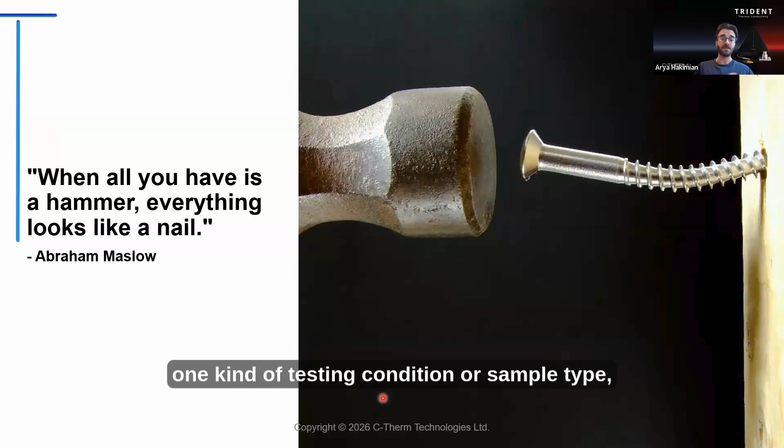This quote here is one we like to reference from Abraham Maslow: when all you have is a hammer, everything looks like a nail. This really embodies the idea behind Trident. One of the biggest sources of poor measurement data or issues with results is when you're trying to take a method that may be really good in one area, one kind of testing condition or sample type, and then apply it to a broad range of materials it may not be designed for. So with Trident, you have more of a toolbox approach to pivot into the option that's most appropriate for what you are looking to do.

For those that may be new to thermal conductivity, or just looking for a general refresher, towards the end of last year we updated our method selection guide. This is a fairly recent update that covers all of the transient methods available on Trident, as well as other methods available in the industry. If you're looking to dive into a bit more detail on some of those different options, this is a nice free resource available that I'd recommend taking a look at.

But all that being said, done with the little intro. Now we're going to jump into our topic here today, which is thin films. When I was looking through recent work we've done in the past year, but also what's been published out there and some things popping up in the news, thin films are certainly a hot area for a variety of different reasons.

The whole miniaturization, or trying to decrease the weight of different systems, thin films can really be an enabler for many of these different technologies, ranging from standard electronics to maybe some things going into aerospace or defense industries. Another interesting point I've seen is a lot of work on optical-based technologies.

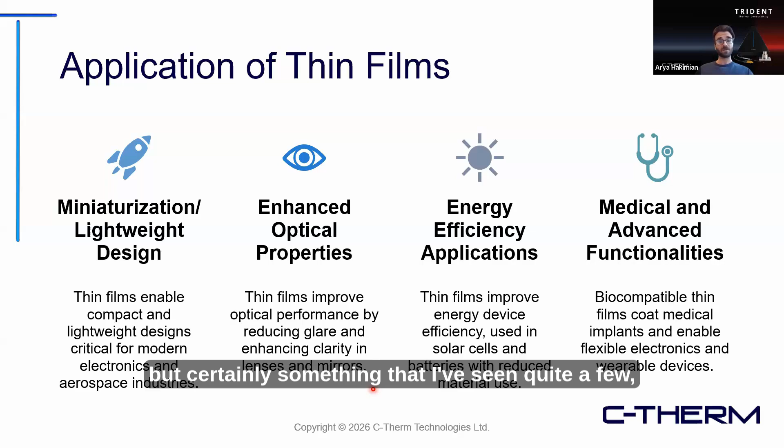Energy efficiency applications—whether this is energy harvesting, energy storage, batteries, solar cells—certainly have a play with thin films. And then another one, maybe a bit more niche, but something I've seen quite a few areas of research being done in is biomedical or medical-based devices, different types of protective coatings for implants or more flexible electronics.

These are all different areas where thin films are certainly at play. It's by no means all-encompassing, but some of the more common themes we've seen over the last year or so.

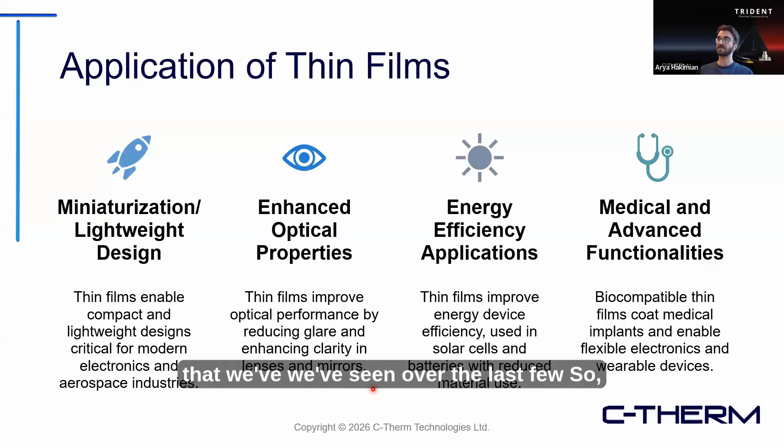I picked this one also. I was just kind of looking. This was from a post from MIT News, something that's quite popular for thin films. This was towards the end of last year, looking at utilizing thin films as an enabler for lightweight, but specifically on night vision technologies. Combining that lightweight miniaturization with some of those optical applications. I believe this has a variety of applications, but certainly in defense, and some of the augmented reality tools that exist there.

But they're also commenting that with more of these advancements, this specific method they're looking at could be applied to wearables, computing elements in a variety of different ways. A quote from one of the students working here is, this thin film considerably reduced not only the weight, but also the cost, making it overall a better, more easily integratable technology. So, certainly a lot of new and interesting developments going on in this space.

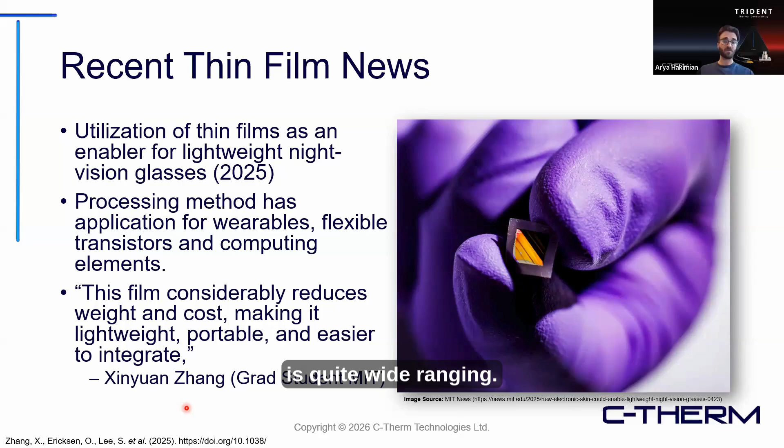So thin films, in terms of where they're being used, is quite wide ranging. Now, coming to the actual testing of films, I'm going to focus primarily on the thermal conductivity side of things, but there are certain challenges that exist. Being a thin film, small format, very miniaturized sample, your traditional steady state methods and many of the more basic, even transient approaches, your thickness requirements aren't really going to be met. So there are some fundamental challenges here just based on what many methods will require as a minimum to be able to take a valid measurement. These are just some of the points we'll talk about going through in today's content.

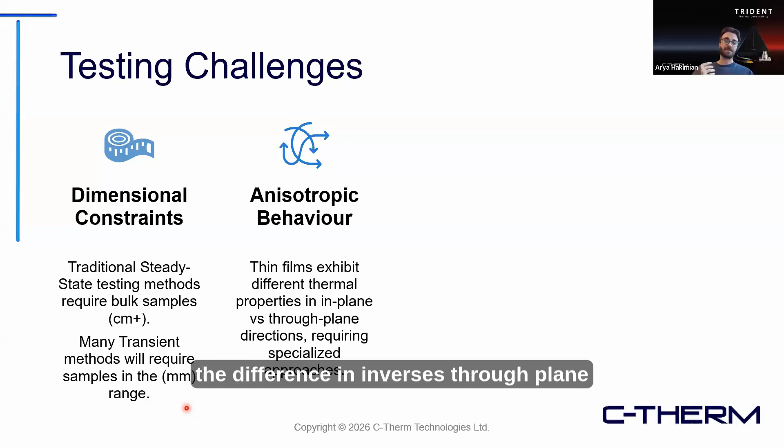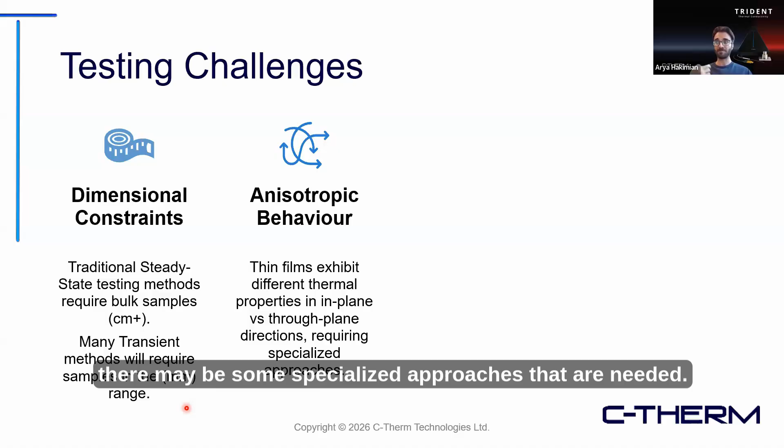Another big one is anisotropic behavior, the difference in in-plane versus through-plane thermal conductivity. Sometimes this anisotropy is present, maybe it's not desirable. Other times groups are really pushing to introduce high levels of anisotropy. But in either case, if it is present, certain techniques may be directionally dependent, others may average out over a larger area. So if you are looking to separate out and quantify those, there may be some specialized approaches that are needed.

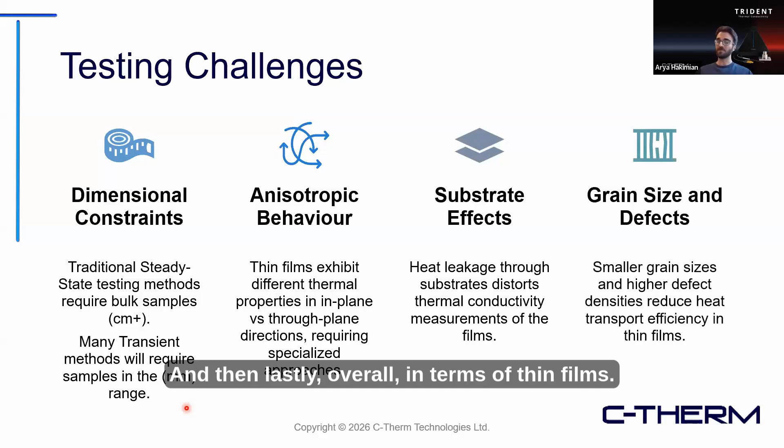Substrate effects. So talking about thin films in terms of coatings, or when your film isn't freestanding, it has to be on a backing material. That substrate impact can potentially introduce errors in the measurement, depending on what type of approach is taken. And then lastly, overall, one of the big things is the grain size and potential defects that can be introduced, whether that's in the formation of the film or how it's being used in application or long-term wear. These are all little things that can come in and impact the overall transport efficiency of that heat within the system. So it's something that should be well understood.

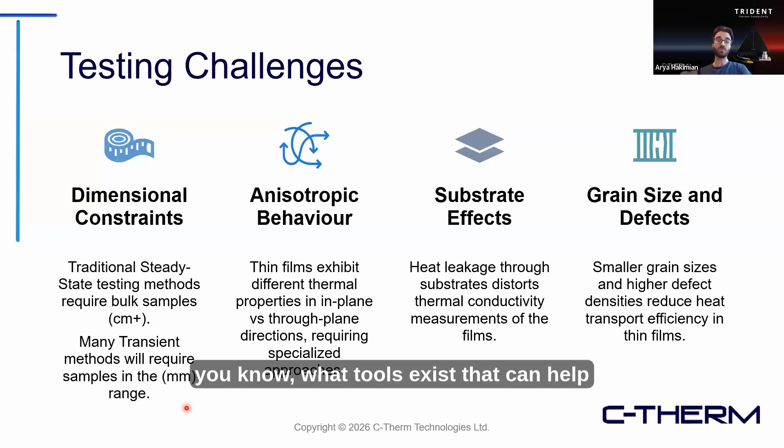So all of these together present certain, let's say, roadblocks in terms of how you would go about testing. So we need to look at what tools exist that can help overcome some of these potential challenges.

But overall, before we go into some of the different methods, we're talking about thermal conductivity, but why does it matter? Across a broad range of material types, thermal conductivity, you'll see some similarities in that, and true for thin films as well, but very much ultimately used as a benchmarking metric for the overall performance and the reliability. And really depending on the application space, can have quite a big influence on that overall system. So whether you're looking at electronics, more insulative coatings, or thin films, or otherwise.

Now I'll break it down into two. So you have your high thermal conductivity applications for more of these thin films. And I'd say by and large the big one is going to be TIMs, or thermal interface materials. So of course, any type of electronic generating heat, we have to have a way of dissipating that, or efficiently removing that from those potentially sensitive components. And TIMs being in quite a variety of different forms, shapes and sizes. Thin format TIMs are certainly something that is being heavily investigated in many of these new technologies that are coming out.

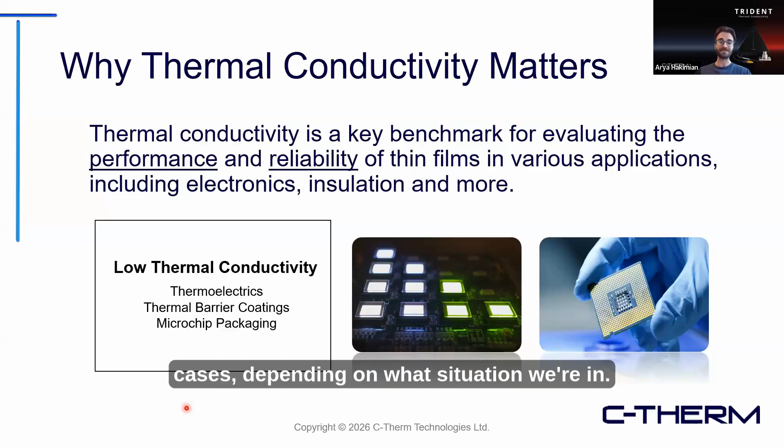But there's also the low thermal conductivity side. For thermo-electrics or thermal barrier coatings, different packaging applications, there are certain scenarios where you're actually looking to more insulate certain systems. Maybe it's for protection, or maybe that's your performance metric, you're targeting lower conductivity as your ideal situation. So you can see both, the high and the low K materials in thin film formats have different use cases depending on which situation we're in. This was a publication by Yang et al. in 2025.

I pulled this just interestingly because one of the highlights, this was on the main summary page, noting here the thermal conductivity was decreased from about 0.6 to 0.22. And that was their desirable outcome.

In many cases, a lot of what I more regularly see is groups trying to bump up that thermal conductivity, again a lot of those thermal interface material situations, but certainly some scenarios where going the other way is more important.

Specifically for this application, for those in the thermoelectrics space, you'd be familiar with the thermoelectric figure of merit. So the equation here, you can see the different terms, but where thermal conductivity comes into play, being in the denominator, we're trying to have a high ZT value, but to get that, we're looking for low K systems.

So in the context of these thermoelectric applications, again that lower K material property is more desirable. Just a little bit of a tidbit of information there for those that may be entering into or working in this space.

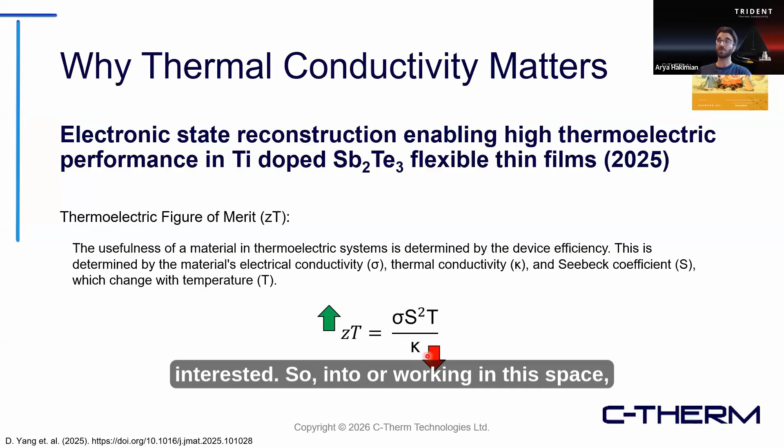But this brings us to, okay, we know what we're looking for, we know the sample type, but how do we go about testing it? So on the Trident system, there are a few different approaches we'll look at today. First one being with the Flex Transient Plane Source, or TPS.

So the TPS, you can see a picture of it here. This is a very thin, flexible, double-sided sensor design. But specifically, we're going to be looking at the thin films utility, as described in the ISO standard, ISO 22007-2. For folks interested in TPS testing, this is a really great resource if you don't already have it. It really outlines what this can do for you.

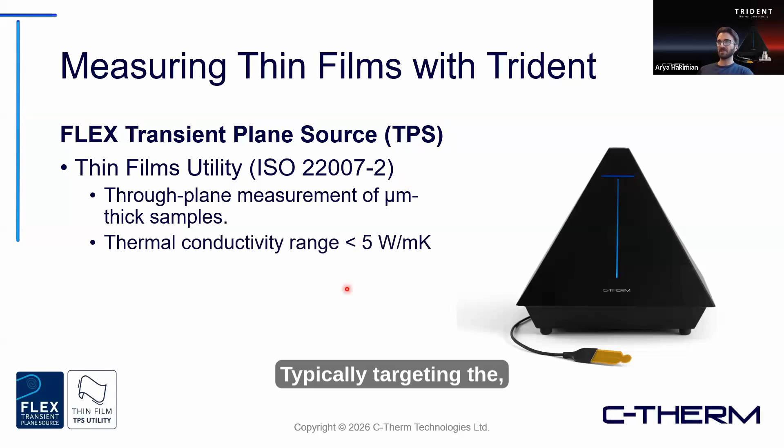So the thin films utility, this allows us to do a through-plane measurement of micron range thick samples, typically targeting more on the lower conductivity side of things, like sub 5 watts per meter Kelvin as a general rule.

Really important when doing testing with the thin films utility is that your materials have a well-defined and uniform thickness. Part of the actual measurement procedure is to use the measured material thickness as an input. So of course, the more control and consistency you have over that, the better your outputted results will be.

I wanted to highlight that the TPS thin films utility, of all the options of TPS testing, is one of the more different approaches, in that it involves a sequential layering procedure and subsequent measurements that are tested. It's not just one singular measurement. And it kind of looks something like this.

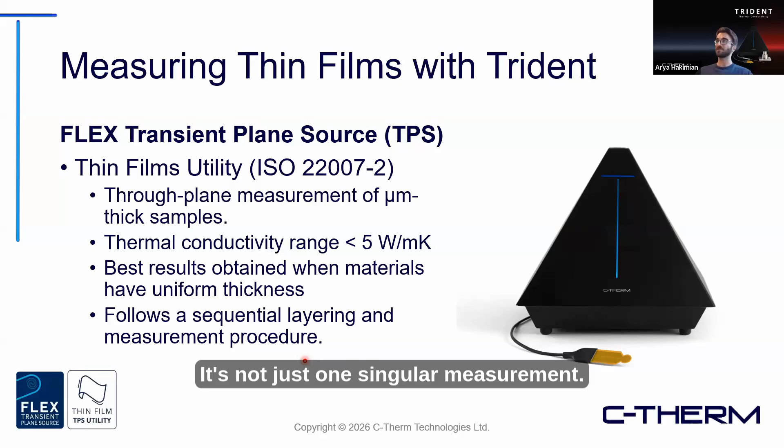Your overall setup, you actually have your sensor in conjunction with a conductive backing material. So this is like your blank or your base measurement. The first test you run with TPS thin films doesn't have any material or thin film at all - you're just taking your blank. You would then take your setup, mimicking what we had in our blank, but now adding in a layer of that film. You would then repeat this a second time with a second layer.

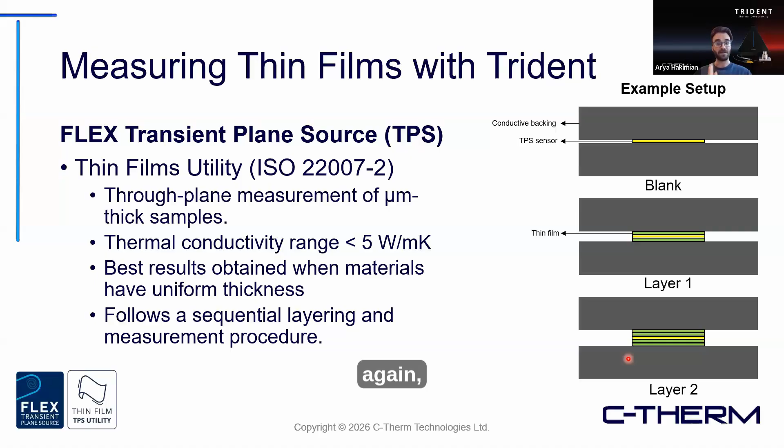Overall, what the testing procedure looks like is you have your sensor with different amounts, starting from 0 to 1, 2 layers of your film. And it allows us to build out a temperature versus film thickness linear regression. Based on that data, we're able to extrapolate out that thermal conductivity, in that Z direction, or that through-thickness of the material.

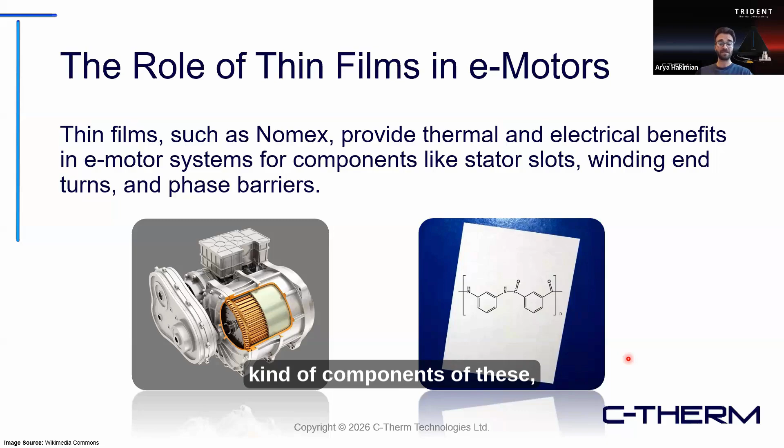So an application that we saw, I believe this popped up at a conference one of our colleagues attended last year, but they were talking about the use of thin films in e-motors. Really highlighting the use of a specific one, actually Nomex. Nomex, if you're familiar, is very commonly referenced for its thermal and electrical benefits in different components of these e-motor systems.

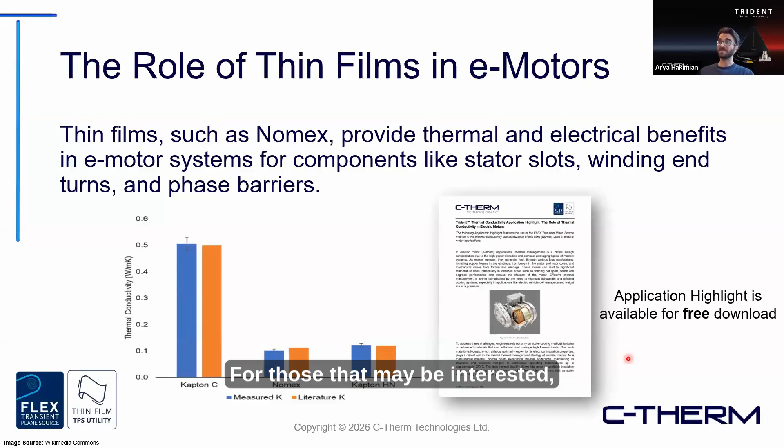So these types of materials like Nomex or related materials like Kapton, for example, these are all things that have been very well tested in the past using the TPS utilities, specifically the thin films utility here. For those interested in looking at more than a few data points, we actually have a full write-up on this application note, available as a free resource download on our website.

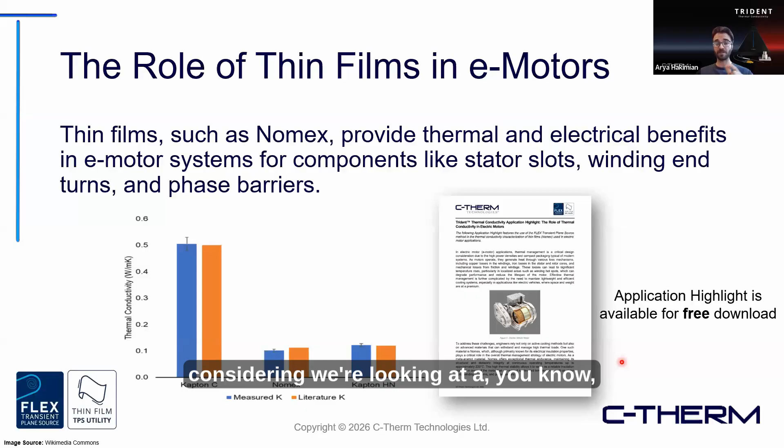Another use case for the TPS thin films is looking at thin films used in fuel cells. My colleague Genesis, who's a lab manager at our thermal analysis group, was doing some work with this last year, looking at different layers of the systems involved here. So whether you're looking at membranes, catalyst layers, or the GDLs, these different materials, thin in nature, can be potentially very relevant in terms of their heat transfer performance.

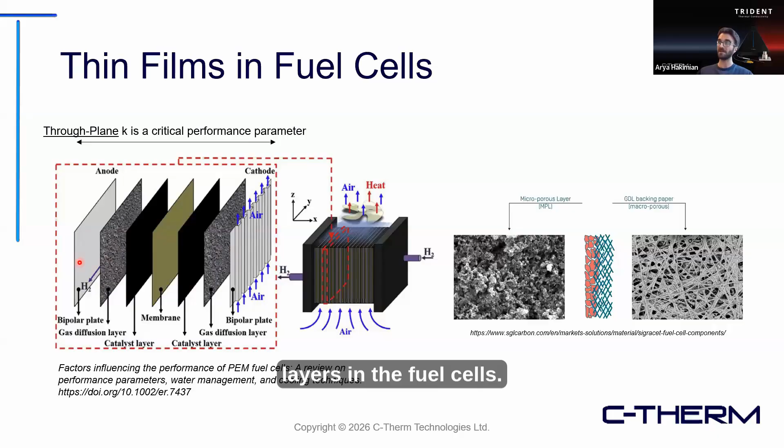Really, the through-plane performance is what was targeted here as the primary driver of interest as it relates to the reaction system as it would go through these different layers in the fuel cells. So some of the testing that was done, again, used the TPS thin film setup.

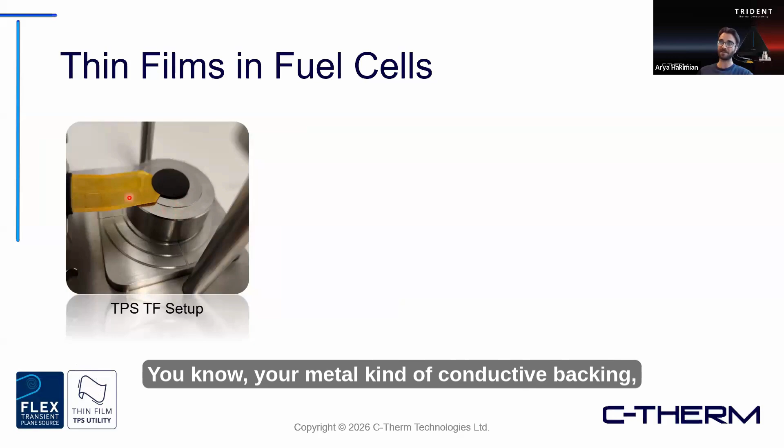Here you can kind of see what half of that setup looks like - your metal conductive backing, the sensor, and the top sample placed over top. Here's another example data set that was looked at.

Comparing two different materials, a neat GDL versus an MPL plus PTFE sample, you can see how they compared in terms of material selection for the system use case. But then there was actually a second set of these materials where it was densified, to see if that significantly impacts the performance of the material.

And as we can see, and as you may expect, the more densified the material is, the better the overall transfer networks will be available, resulting in an increase in thermal conductivity. That being said, these different sample types, being thin films but in different application spaces, show some different capabilities with our thin films on TPS.

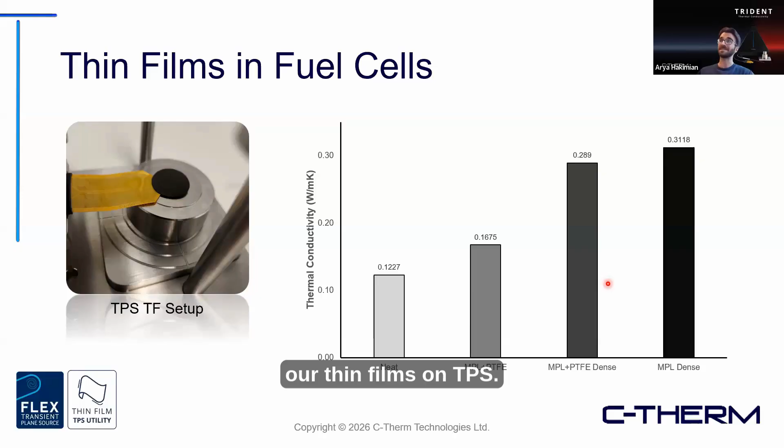But when I was talking about the thin films system, that was, of course, a Z direction or through-plane measurement. There is certainly some interest in the in-plane direction. So how would we go about assessing in-plane thermal conductivity of some of these films? How would we do this on Trident?

Again, I'm going to look at the TPS here, but this time, instead of looking at the thin films utility, I'm pivoting into the slab option. Slab is again a different functionality of TPS - it's an in-plane measurement of the material as it relates to heat spread, rather than heat transfer through.

With the slab utility, it's generally recommended for higher K sample types. The ISO standard stipulates 10 watts per meter Kelvin or higher is ideal, usable down to materials that are above 1 watt per meter Kelvin. But again, generally in the higher K range.

There is some similarity between the thin films option and the slab, in that they both need the input of thickness - how thick the sample is - as part of the testing procedure. So having a well-defined thickness is going to be ideal and important for best results. And similar to the TPS thin film setup, there is a specialized slab setup that is done, and this is what's really allowing us to get at that in-plane measurement.

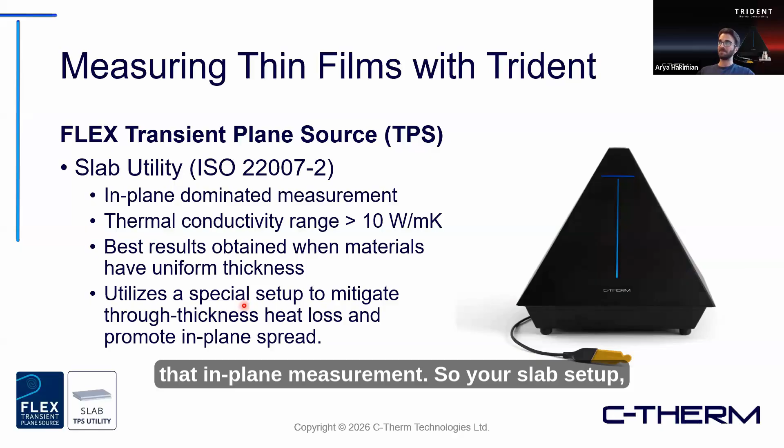So your slab setup: you have your sensor with your two test pieces, but now your backing material is not a conductive sample like we saw with the thin films - it's actually an insulative backing material. Because the idea here is that the sensor is where the heat's being generated, and we're assuming this heat is traveling through the thickness of these very thin samples very quickly, so of course it's going to hit this boundary condition.

If you're familiar with transient approaches, in the more basic or bulk style measurements, the assumption is that no boundary point is reached - it's viewed as a semi-infinite medium. But there's a bit of a difference in how the data is interpreted here, where this insulative backing is here to essentially halt that heat transfer in the through-thickness direction and promote the spread in-plane.

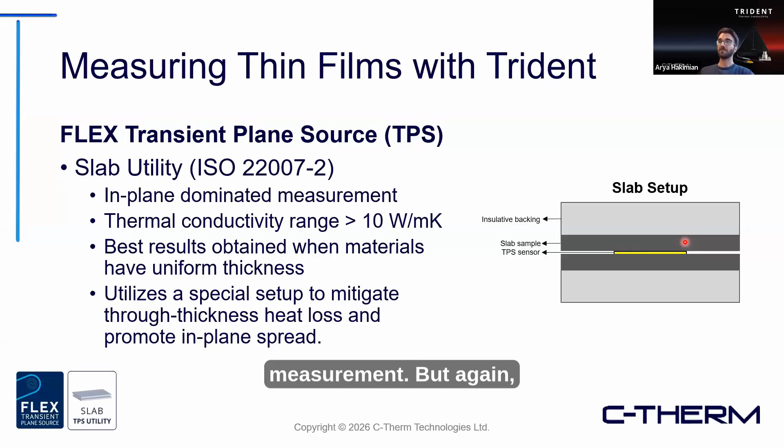Slab and thin films are somewhat opposites of each other in terms of their setups and the directionality based on the measurement. We're utilizing slab here for some in-plane high K measurements of heat spreader applications.

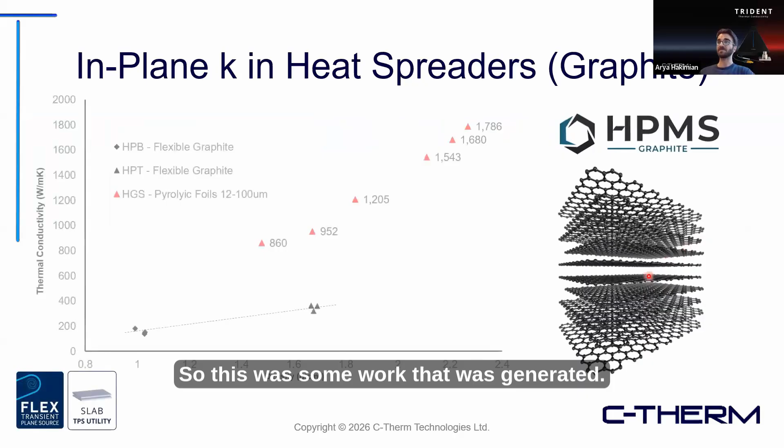This was some work developed in the past year or so, looking at measurements of very conductive, very thin graphitic materials. You can see a few different groups of materials here, including some flexible graphites, flake style, versus some pyrolytic foils.

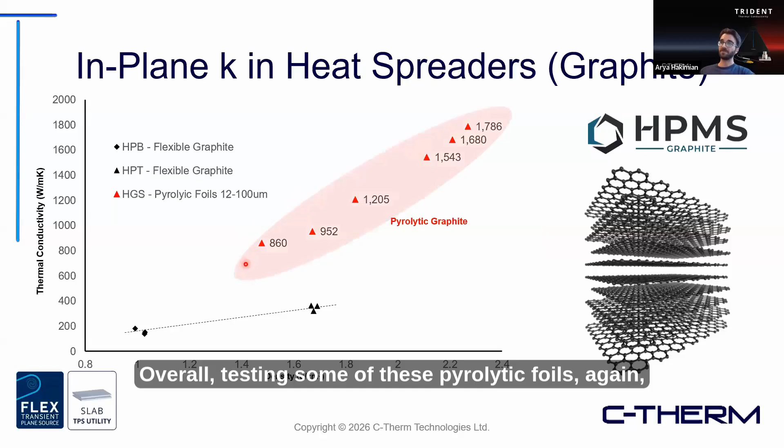Testing some of these pyrolytic foils, very thin, micron range, we were able to get some exceptionally high K results. This is a trend we've seen more and more—very highly anisotropic with very high in-plane conductivities. Over the past six months, there have been multiple opportunities where this was a key focus for groups we've worked with.

Now these samples here, while they weren't into that 1,000+ watt per meter Kelvin range, still a few hundred watt per meter Kelvin—quite high in the grand scheme of things compared to many other materials in this space. To assess these materials specifically, this is where we needed the slab utility, because we're looking more at that in-plane heat spread as the dominating property of interest for these groups.

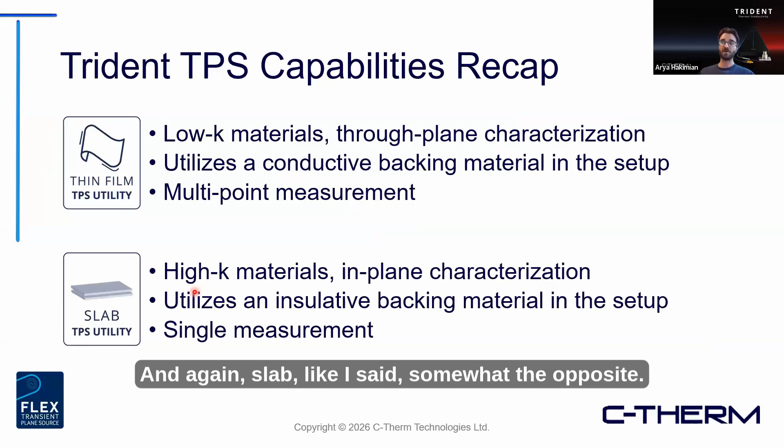As a quick recap on the TPS: the thin films utility is great for lower K materials where through-plane is of interest. It utilizes a conductive backing material, and the measurement flow involves a multi-point measurement approach. Slab, as I said, is somewhat the opposite—you're dealing with higher conductivity materials in-plane, using an insulative backing material, and instead it's done with just one singular measurement.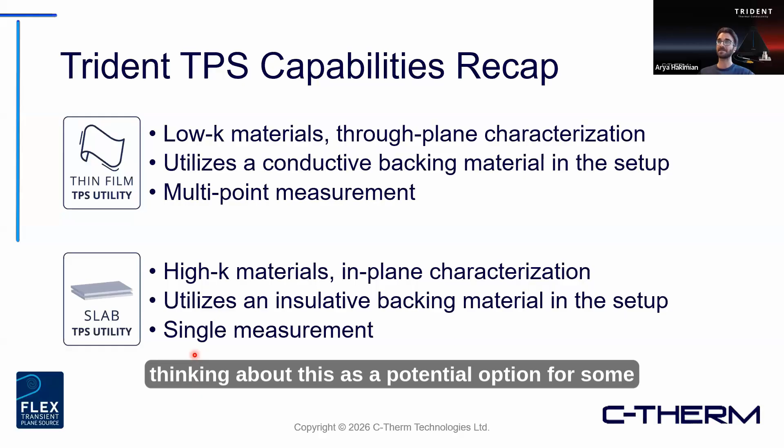I'll highlight this for folks interested in this space, or if you want to deep dive a little more on TPS. There's certainly a lot more information we could go into on this, but just wanted to give you that, to get you thinking about this as a potential option for some of your work.

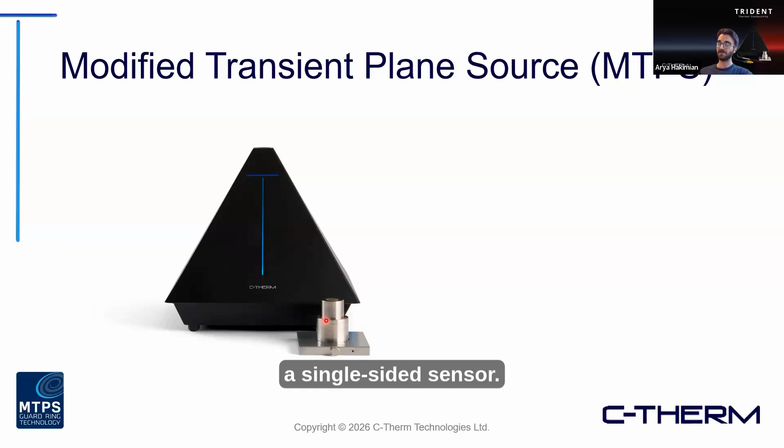Now, we talked about TPS, and one of the other methods available on Trident is the modified transient plane source. This is C-Therm's proprietary sensor design, a single-sided sensor. For those familiar with MTPS, you may wonder why I'm bringing this up for thin films, because your minimum thickness requirements vary depending on material type, but typically we're in that millimeter range. So fundamentally, there's a gap if you're looking at some of those micron range thicknesses.

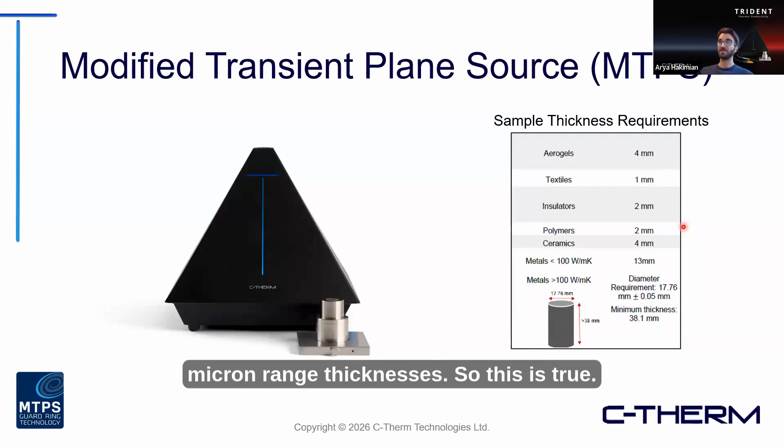This is true—your sample thickness in the standard setup has to cover the length and width of the sensor face, which is about 18 millimeters in diameter, with a thickness in that millimeter range. However, there are some options here.

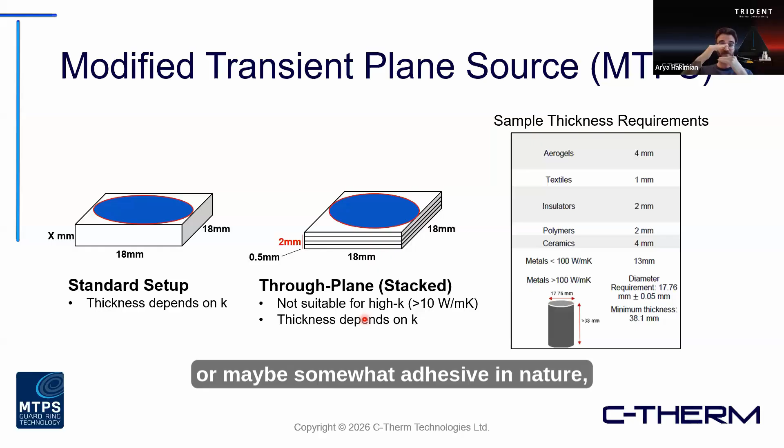One of the main ones is a stacked approach with some of those thinner samples, layering them up to achieve your desired or minimum thickness requirements. I will highlight this is not suitable for all materials, especially once you get into higher K samples—the contact resistance between those layers starts to result in quite a bit of error. The quality of those layers, if they're very flat and planar, or maybe somewhat adhesive in nature, you can get really good stacking. But when you have more uneven, non-uniform surfaces, that's where it becomes a little more problematic.

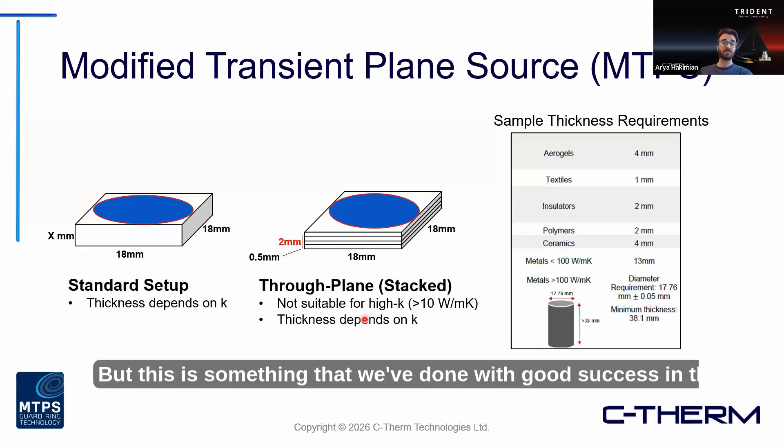But this is something we've done with good success in the past, and I wanted to highlight this application we did in conjunction with Tesa Tapes a few years ago, where we were testing thermally conductive self-adhesive tapes using the MTPS.

In this study, these samples were designed for e-mobility applications. They had thermal conductivities in the range of about 0.7 to 2 watts per meter Kelvin, which was their product of interest at the time. But their thicknesses—some samples were in the millimeter range, but they did have quite a few that were micron thickness, so below what we technically needed. So again, this is where that stacking came into play.

The whole challenge and reason we did this project together was they were running into issues checking their materials in situ. So taking the samples, putting them in a system, turning it on and measuring how much heat was actually being generated and how efficient those tapes were at transferring heat. And when they were comparing their materials to competitor products that had a spec technical datasheet value, something wasn't lining up for them. So we came in as a third party to assist with this investigation.

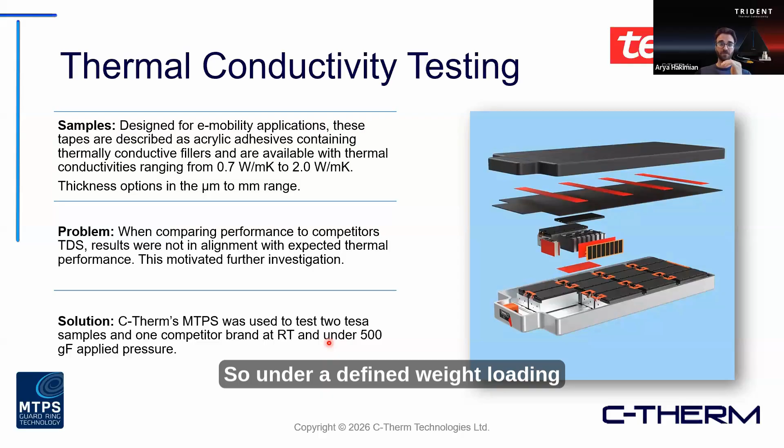What we ended up using was our MTPS to test a couple of their samples, one of the competitor samples, at room temperature, keeping as many things controlled and fixed as we can. So under a defined weight loading of about 500 gram force.

Essentially what the data looks like, you can see it here. The two TESA samples that we ended up testing, our results lined up quite well with the technical data sheet. One of them came actually a little bit higher than what they had previously expected. So this wasn't shocking to them, this was in line with what they were expecting.

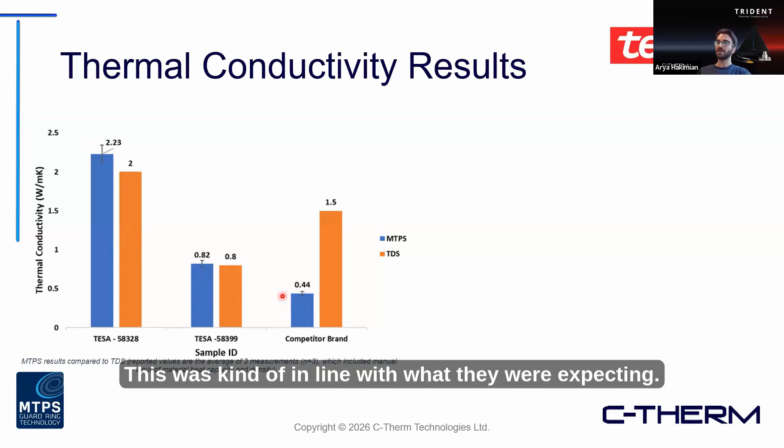But this over here was really what helped answer some questions for them, because in situ they were seeing some ambiguity between what the technical data sheet was saying and what that product was actually providing as an output. And when we did the test, we were showing that the actual thermal conductivity was significantly lower than what was on that spec sheet. This really validated what they were seeing with some of the issues there.

The benefit behind MTPS in this context is that it's a very quick and easy way to compare, if you've got multiple different kind of similar materials and you're wanting to understand where those highest performers are, where those lower performers are coming at. It's a very simple approach to understanding this. For them in their application, this type of discrepancy can have significant impacts on the overall temperature of some of these EV-based systems. So it's really important for them to be aware of where they are falling in terms of general ranking with some of the other competitor products.

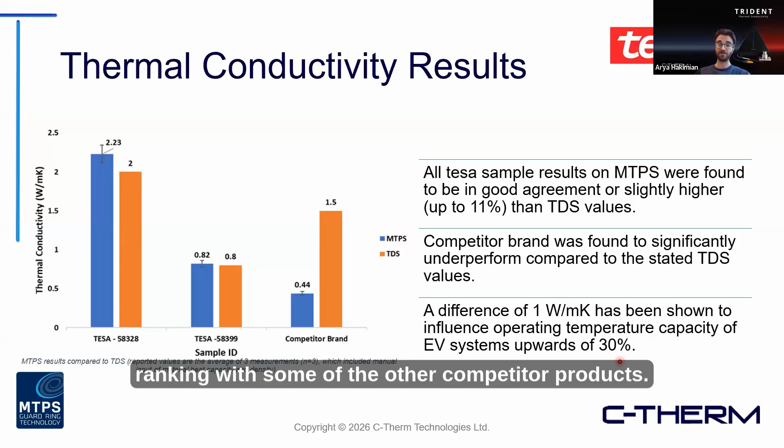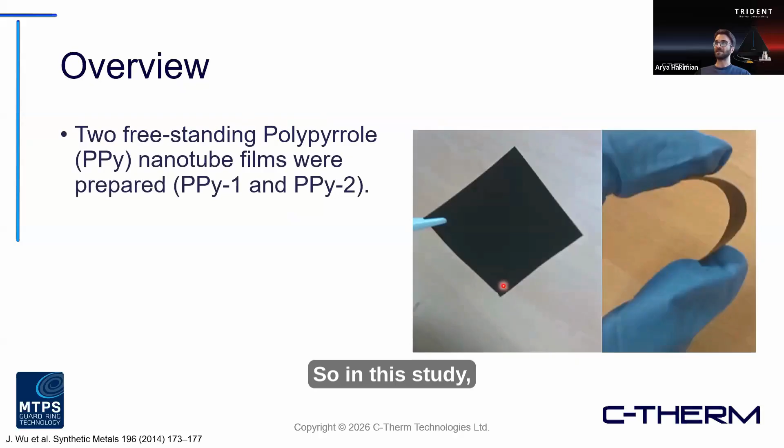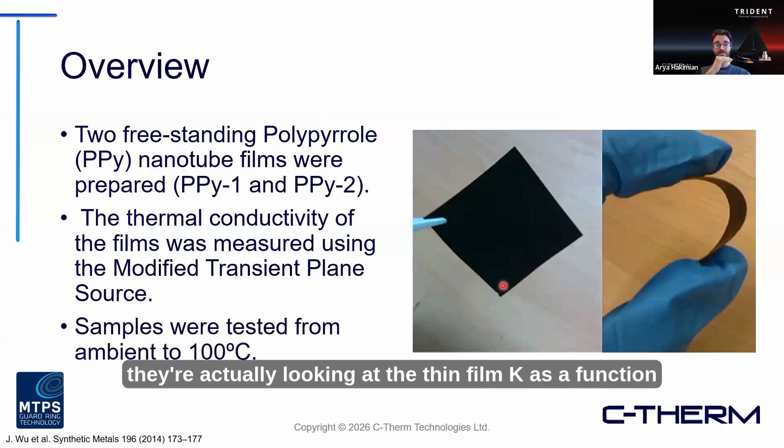This here too, I wanted to share a quick example. Another group working in flexible thermoelectrics, again referencing the use of the MTPS. This is some work coming out of Singapore and China. In this study, they were looking at these polypyrrole nanotube films, two different variants here. The thermal conductivity was tested using the MTPS. And interesting in this one, they're actually looking at the thin film K as a function of temperature.

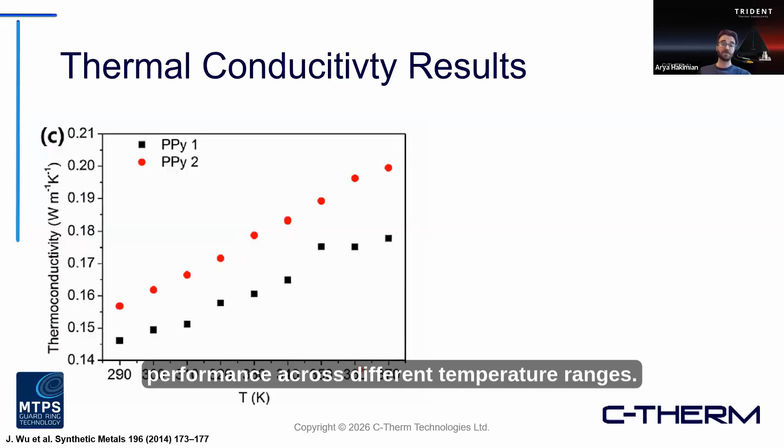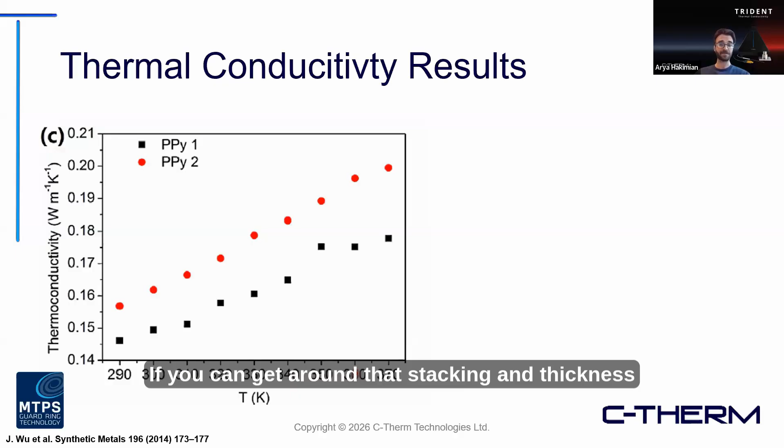So we kind of skip to the results here. You can see again a very nice way of comparing a sample to another material, checking its performance across different temperature ranges. Other variables that can be looked at are different applied force loads. Humidity conditions is something we've seen pop up as well. So these different kinds of investigations - the MTPS certainly does have some play there if you can get around that stacking and thickness requirement.

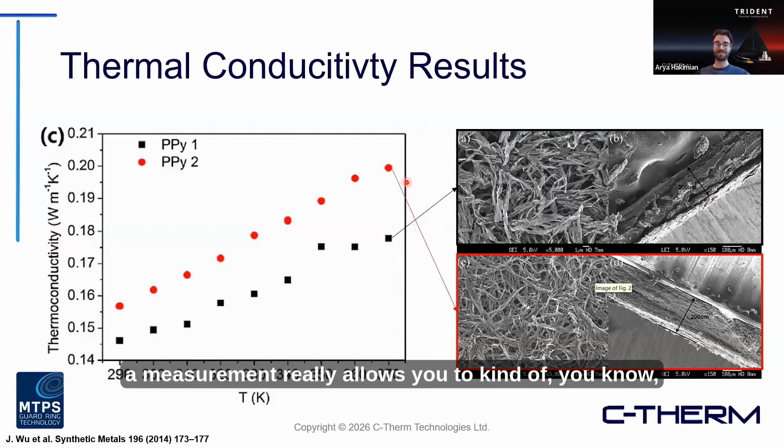I always like showing an SEM image of the samples if we got them available, but you can see the general gap between the two different samples here was ultimately related to that quality of the film. Mentioning earlier some of those challenges with defects in the structure, these are things that you can visually inspect, but really being able to quantify that through a measurement really allows you to have a strong basis in where that performance is going to be.

So as a quick recap here, MTPS again is a really quick, easy way, really great for high throughput environments where you're comparing a multitude of sample types. The benefit here is that there's no settings that the user is adjusting. It is very much a plug and play option, so it really negates any introduction of user bias compared to some of the other methods that are available.

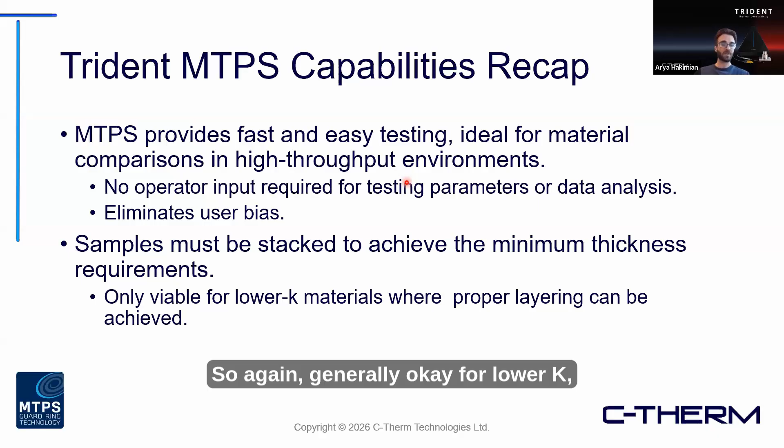Now again, like I've said a few times, just to make sure it sticks, you do need to achieve that minimum thickness. So if you can stack, there is a viable path forward. Of course, if not, that's where you may want to look at some of the other tools. Generally it's okay for lower K, like a lot of polymer-based films, adhesives, things like this - we've had really good success in the past with that.

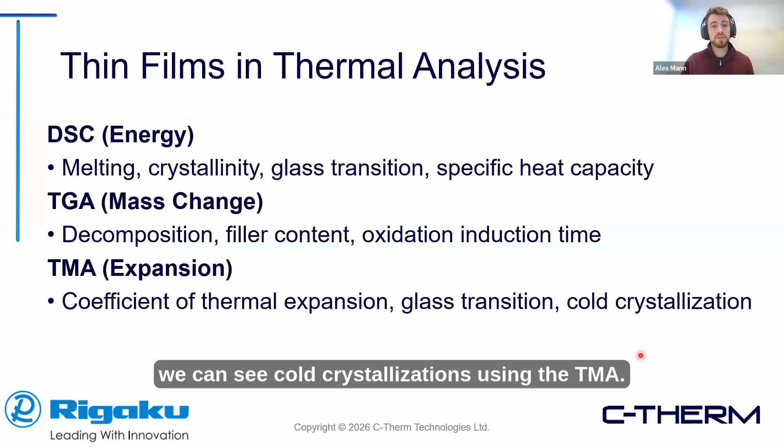The reason we're focusing a bit on TMA is that it requires a special attachment or holder to do this. For the DSC and the STA, the instruments don't require anything special — they can just be run as usual. It's more about the sample preparation.

Rigaku's thin film TMA, is specifically for thin film. Not only can it be used for thin films, but also foils, wires, fabrics — anything within the 10 to 200 micron range. Specifically for thin films, we can go all the way down to negative 150 degrees, which is good for Tg of fluorinated polymers, all the way up to 600 degrees Celsius. Its primary use is for polymeric thin films, so a high temp of 600 is more than plenty.

Because it's a thin film, we need to apply a bit of load to keep it from sagging or buckling during the measurement. We can apply a tensile load as low as 1 millinewton, or as high as 1,000 millinewton. For film dimension, anywhere between 10 to 200 micron is good; after that we'll have to switch to regular TMA. Film length has three options: 10, 15, or 20 millimeters, and the width is fixed at 5 millimeters.

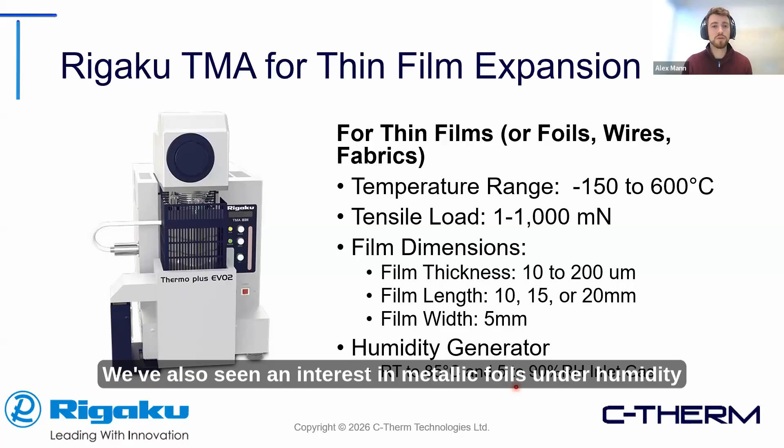One really interesting thing about the Rigaku TMA is the option for a humidity generator. This goes beyond the standard ideal condition, bringing it into real-world application. We can add humidity — our inlet stream to the instrument can range from room temperature to 85 degrees Celsius, and our relative humidity can span from 5 to 90%. This lets us determine how much the sample will shrink or grow when we add or remove water — the coefficient of hygroscopic expansion. This is useful for things like fabrics and hygroscopic thin films, but we've also seen interest in metallic foils under humidity as well.

So real quick, TMA methodology and why the thin film needs something different.

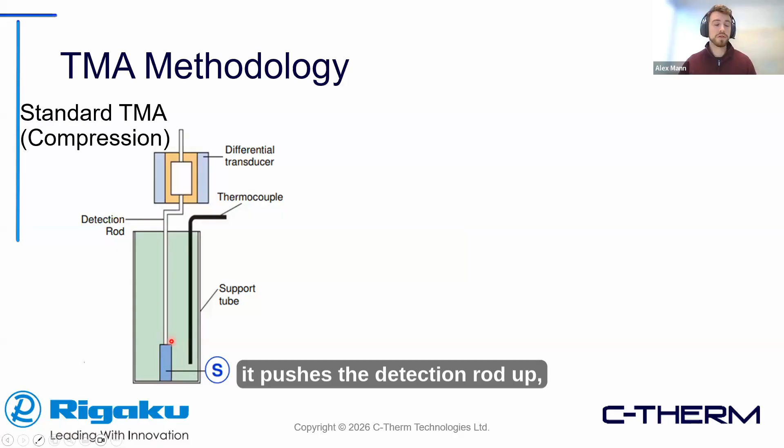For the standard TMA compression, our sample, shown in blue, sits inside a hollow support tube. On top of the sample rests our detection rod. As the sample expands, it pushes the detection rod up, which is then registered by the detector or differential transducer. So it is compressive.

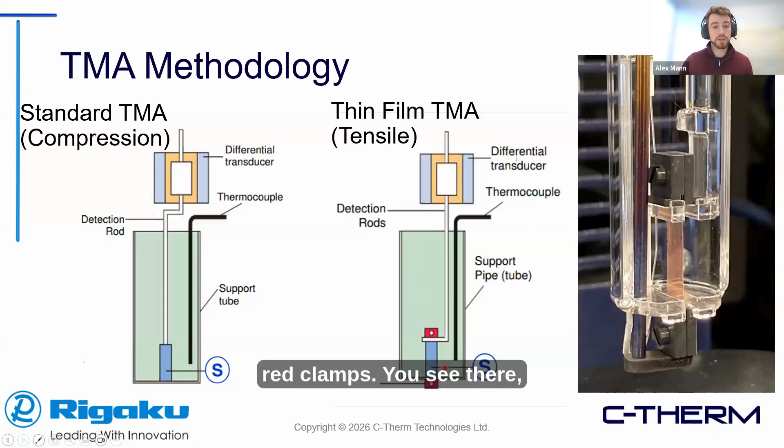Now if we move to the thin film, if we compress it, it's just going to buckle. So the way it works is the thin film is clamped using the two red clamps you see. The bottom clamp is actually outside of the support tube and is pinched or hooked. Then the detection rod pulls it upwards. This is where we get the tension.

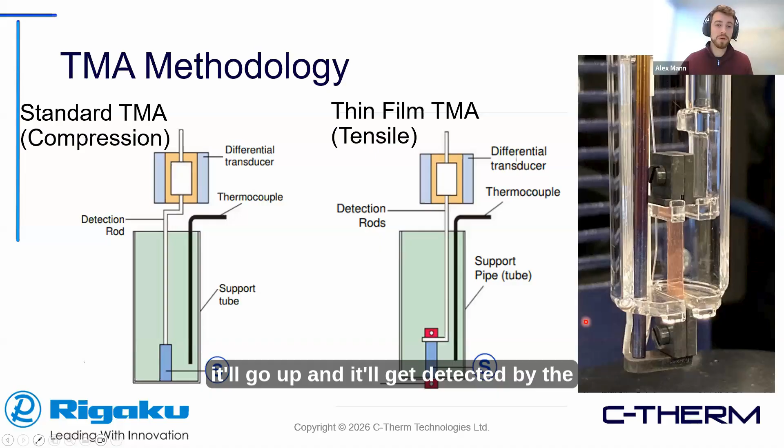So now when the thin film expands, the detection rod will go up and get detected by the differential transducer or mechanism.

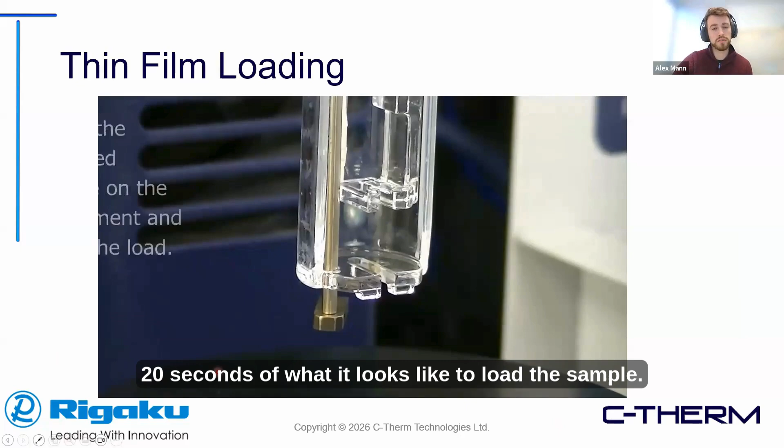Here we're going to show just a quick video, 20 seconds of what it looks like to load the sample. As you can see here, the detection rod is free—it can move up or down.

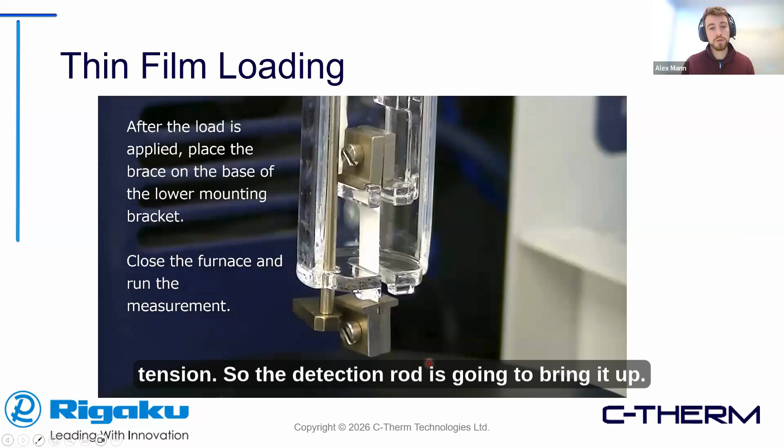So we place our clamps, then hit the button to allow tension. The detection rod is going to bring it up and pinch or clip on the bottom, outside of the support tube. Then lastly, the little metallic foot is adjusted so that it holds it in place.

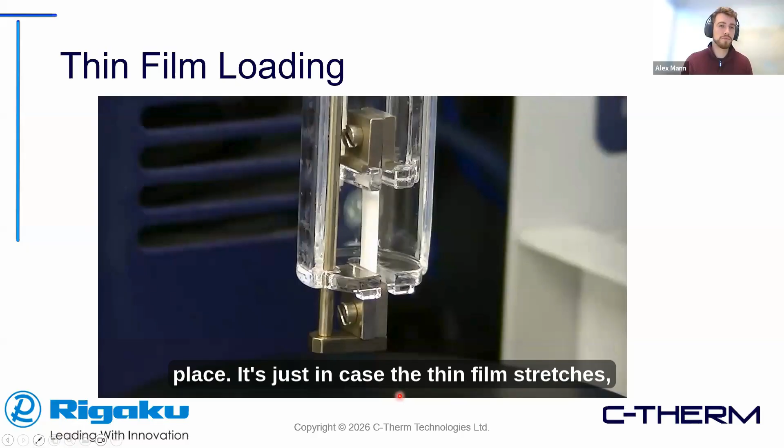This is just in case the thin film stretches, breaks, melts, or anything—we don't want the clamps to fall down into the furnace.

It's really important when setting up your sample that you're not applying too much force, stretching the thin film, but also applying just enough so there's no sag or buckling. So to find the ideal tension range, start off slow and gradually increase the force until it's flush with no kinks, bends, or bowing.

So this is what your standard TMA thin film graph is going to look like. This example is thin film polyether ether ketone, or PEEK, as shown here. We see there are two primary regions—the first, on the left side of the graph, is the glassy zone or vitreous zone.

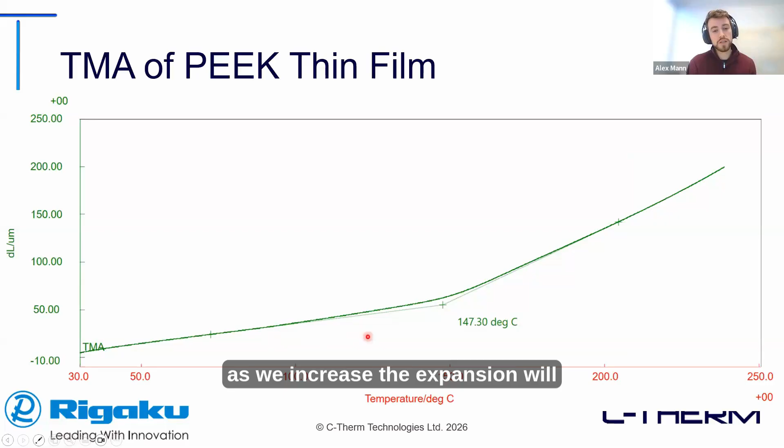As we increase, the expansion will curve to a new zone—that is the rubbery zone. Then if we take the tangent of each of these zones and combine them, we get a pinpoint location. That is where the glass transition point occurs.

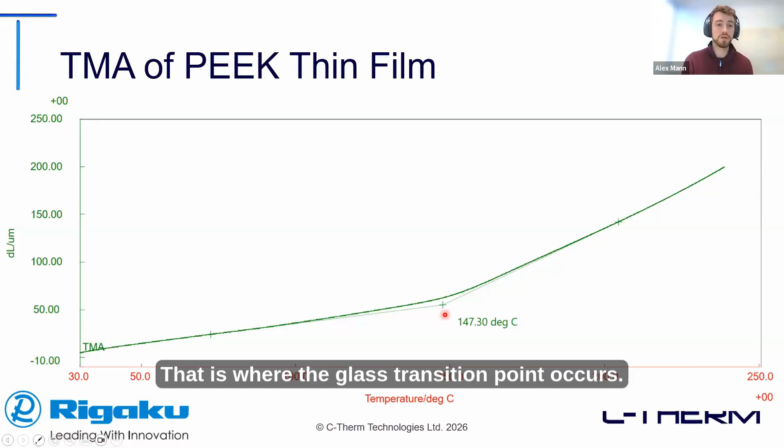So PEEK, for example, is very chemically resistant. It has high mechanical strength, especially at high temperatures. An example of its use would be flexible printed circuit boards in electronics.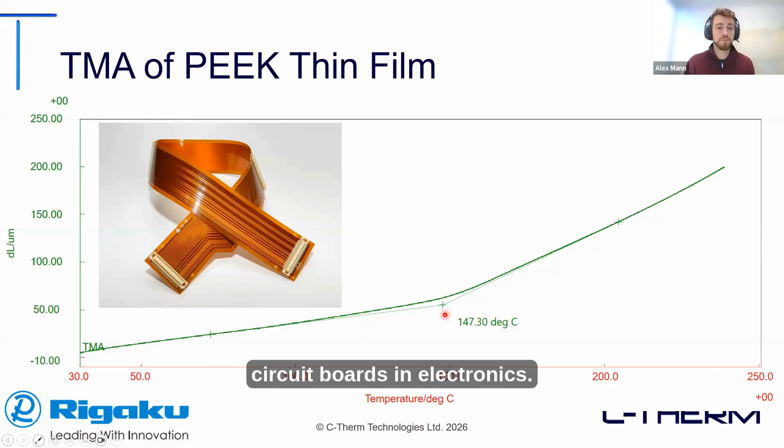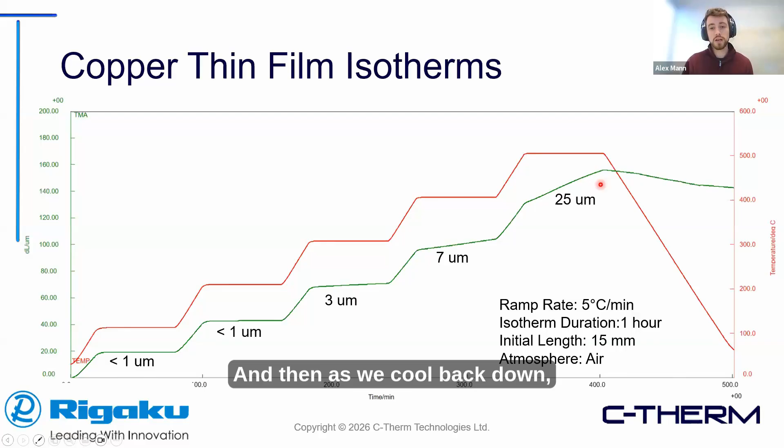And then as we cool back down, we see that the sample has been permanently damaged. This is because as the copper reacts with the air, it tends to oxidize—so as we saw, it turns brown or black.

This is the same test, just looking at it from a different point of view. You can see on the x-axis we have temperature. The first isotherm is really not noticeable because nothing happened during the hold. The second isotherm, we can kind of see it, but again really nothing insane happened.

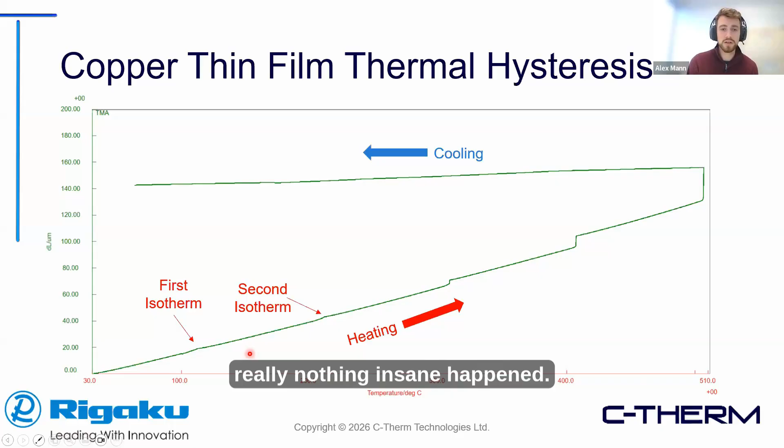Now as we get to 300, third isotherm, we can start to see the jump, which occurs because we're holding, so the temperature isn't increasing, but we're still expanding, which is why we get this vertical line. The fourth one, we can clearly see that something is happening.

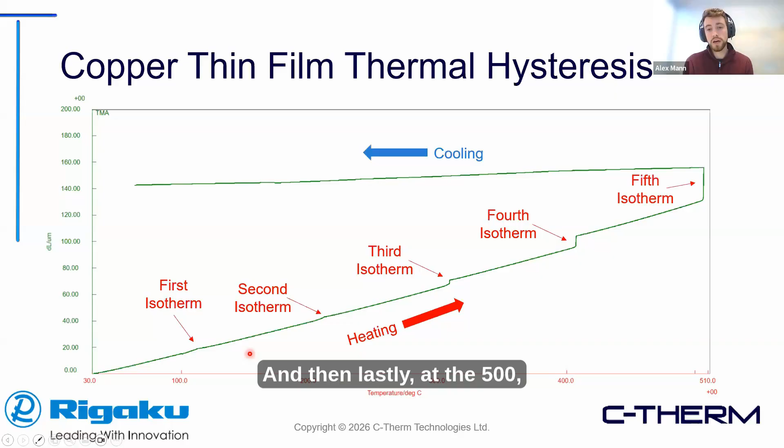We're getting some irreversible damage. And then lastly, at 500, we can see a lot of expansion. We're really damaging our sample.

And then interestingly enough, on the cool down, it doesn't go back to where it initially was. Because it's been damaged, we're left with 140 microns of permanent deformation. So this is kind of how I took the TMA, and it was used in order to get something more insightful or practical, and not just a CTE number.

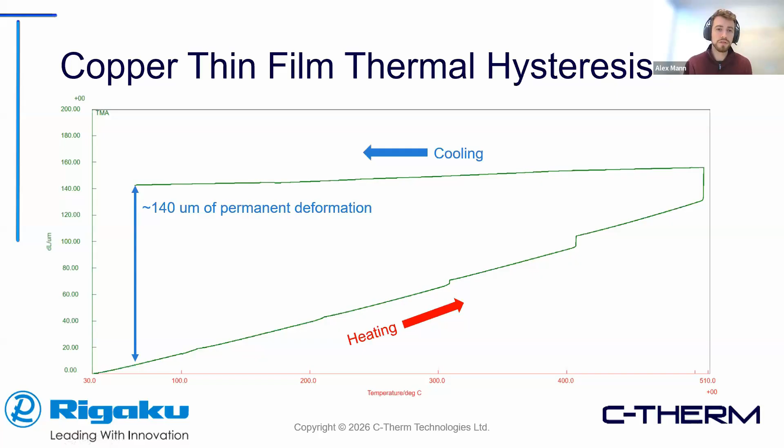So we're going to move on quickly. We're just going to touch base on DSC and TGA of thin films because I mentioned that it's the same thing, but we have to do some sample prep.

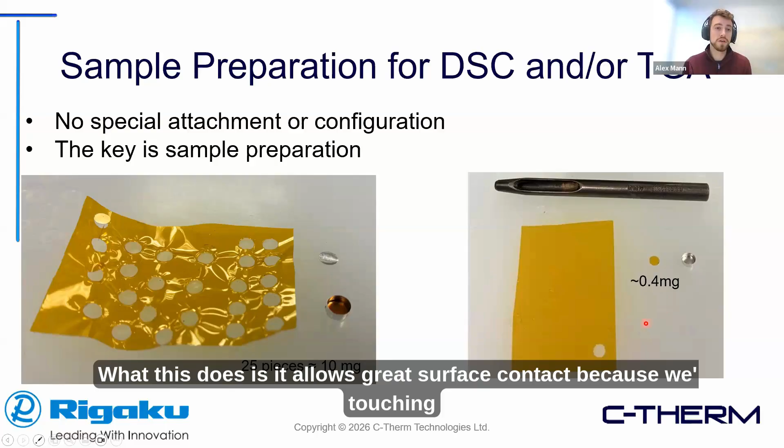So the sample preparation for DSC or TGA, again there's no special attachment. You just use the instrument as you would normally, but the key is the sample prep. For DSC especially, they recommend taking a punch and cutting out a piece which is the exact same size of the inner diameter of the crucible. What this does is it allows great surface contact because we're touching the entire bottom of the crucible.

But one of the issues is that because the films are so thin, we can only get around 0.4 milligrams for this specific sample, which is a 25 micron thick thin film.

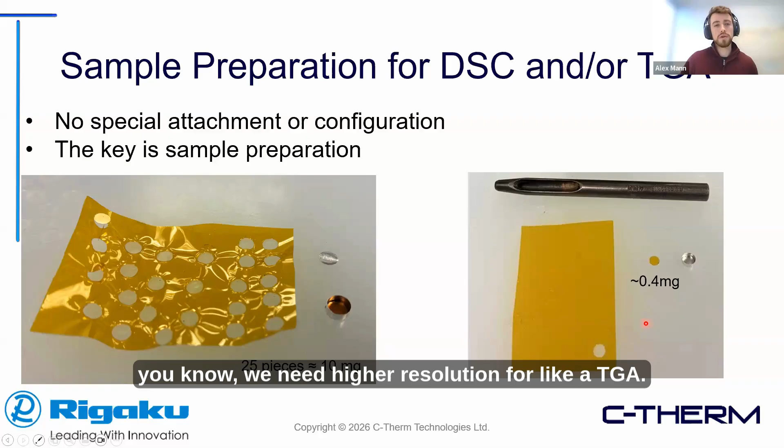So if we're doing something where we need a lot of mass or we need higher resolution for like a TGA, well now what we do is it's actually recommended to take the punch and just stack a bunch of these pieces on top of each other.

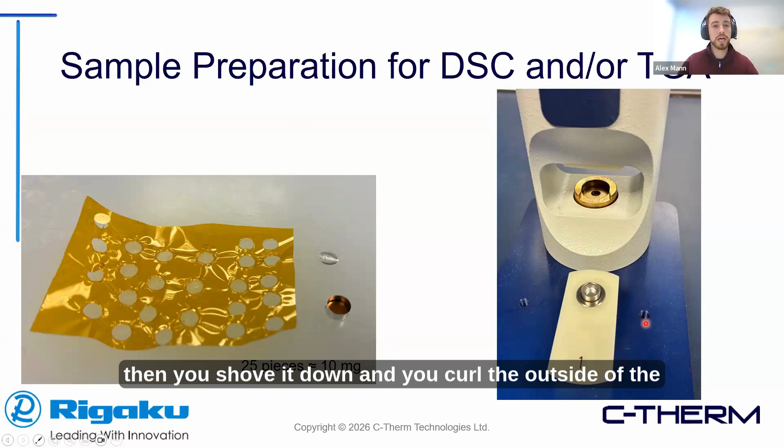And one of the things we have to keep in mind is when we do this, it's highly recommended to now crimp the pan. So what this does is you put the same metal that the pan is, you put the cap on, and you shove it down and you curl the outside of the pan so that it's pressing down on the cap.

Here's a little schematic. So on the left side here, we have our open pan with a stack. And as you can see, in between each layer of the thin film stack, there's an air gap.

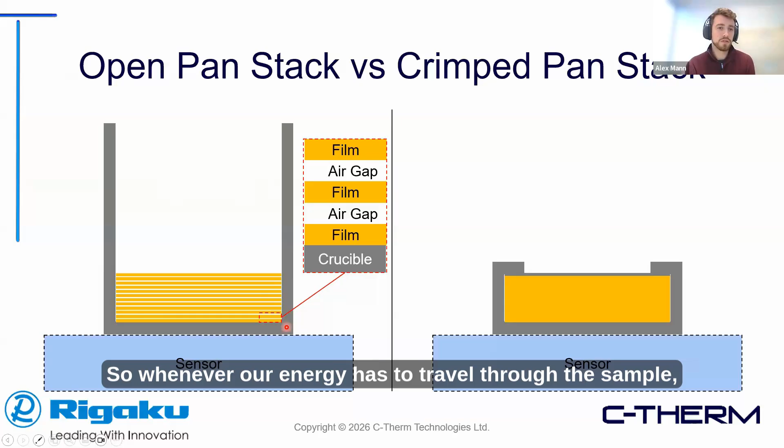So what this does is it decreases the density of the pan or of the system, and it lowers the conductivity. So whenever our energy has to travel through the sample, through the crucible, into the sensor, we're not going to get the best signal. It might be a little delayed.

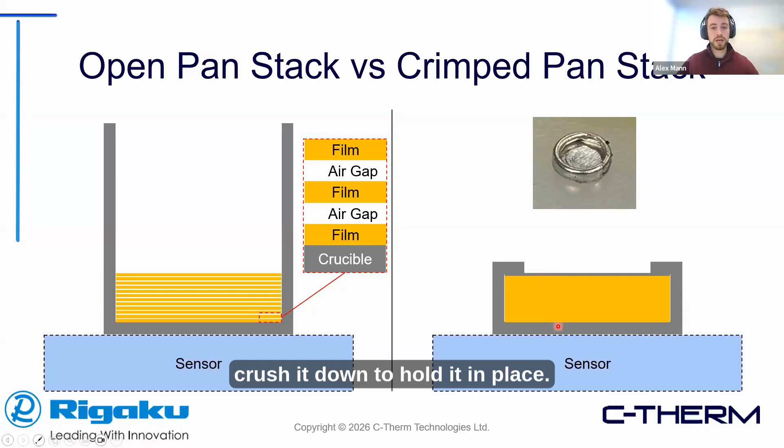So again, on the right, when we crimp the pan, we squeeze all the layers together, and then using the edge or the rim of the pan, crush it down to hold it in place. As you can see there, that's what it looks like, where the edges are curled down around and the pan is getting pushed on by the lid. This gives us the best signal and the best results.

Just a couple quick examples. So we're going to start off with the TGA DSC of PTFE, or Teflon thin film. So we have two things going on here. We have the TGA weight loss and the DSC energy.

We're going to start with our blue line. As we go across, we can see a little endothermic bump at around 325. This is the melting of Teflon. And then after that, we see that we have a large, very large endothermic event. So what this tells us is that our Teflon is going to melt at around 325. And then after that, when it decomposes, the primary method of decomposition is going to be pyrolysis because it's endothermic.

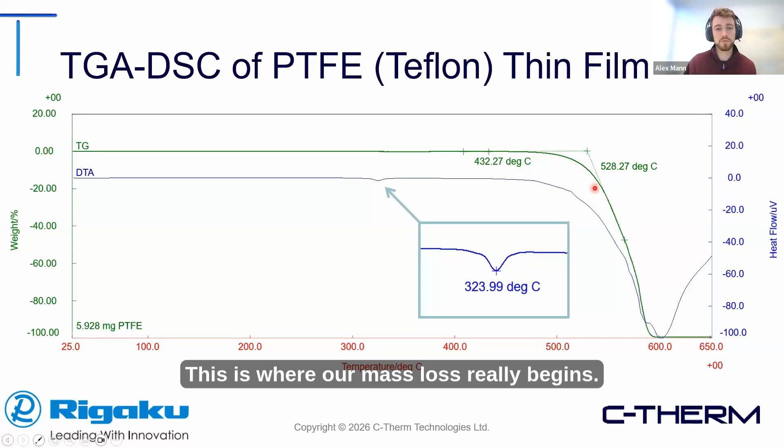When we look at the TGA, we see no mass loss through the first event because it's a melt. But then a little bit after 430, we start to see the TGA curve down. This is where our mass loss really begins. And around 530, it really ramps up.

A common use of Teflon is nonstick frying pans. It's resistant to heat, it's very slippery. But what we see from this graph is that our frying pan range would be good from room temperature all the way up to around 330.

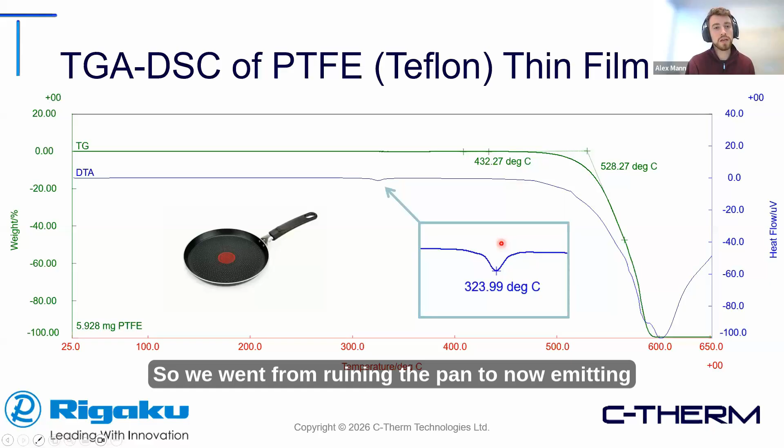Then the Teflon coating melts, so we have effectively damaged our pan. And then if we keep going and we reach around 430, now all of a sudden the coating itself is decomposing. So we went from ruining the pan to now emitting toxic Teflon decomposition fumes.

So just a real quick summary of what went through on my part of thermal analysis. TMA, you're going to need a special tensile loading attachment to do your analysis. And then for the DSC and TGA, nothing overly special, a cheap circular punch. And if your method needs to implement stacking, then it's highly recommended that you crimp the pan. Thank you.